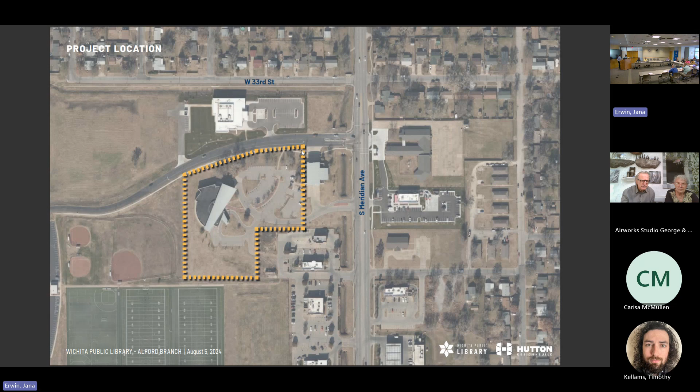This is the Alford Branch renovation, located on South Meridian Avenue. Part of this project will be to add a new drive on this winding road that goes back to the YMCA. We've been told there are wayfinding issues, and a lot of people miss this drive, come through this back part, and have to loop around. That's one of the improvements.

The existing building at Alford is largely designed with aviation as a concept. There are a lot of improvements that will be made. A big ask has been to improve the lighting, improve the acoustics, and redo this front desk.

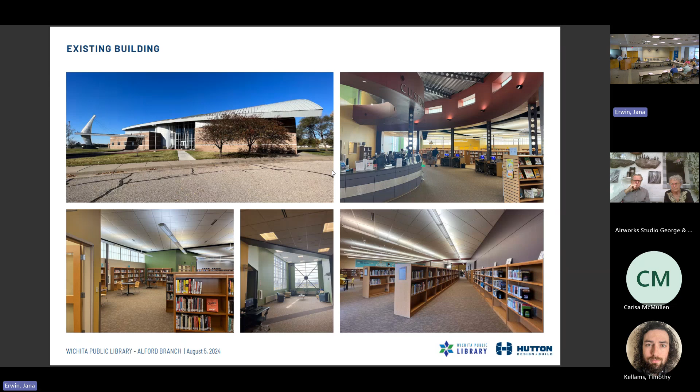We will be going through all of the stacks areas -- children, adults, and teens -- and doing new finishes. We will also be incorporating new meeting rooms and study rooms throughout the branch.

One of the asks we got in the community survey was that one of the focuses of this branch is workforce development, so lots of meeting rooms are needed -- for training, job applications, filling out paperwork and forms. That was one of the big asks received during the initial planning phase. With that, you can see the new meeting room space and study rooms.

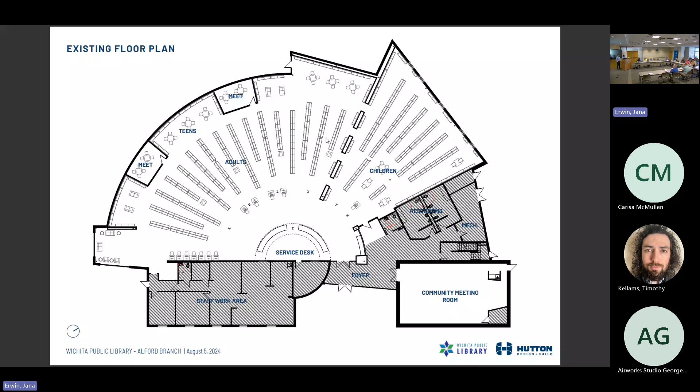This room and this room are existing, but we're adding these two additional rooms, reducing the stack space. Right now it was kind of a sea of stacks in there, so we're breaking that up and working with the operations manager to get the adequate number of stack space. Then improvements in the children's area, bringing a new family room to that space. The community meeting room down here will also be part of the project and receive new finishes.

As James mentioned, the namesake for this library was Boeing for a long time and was really influential in the aircraft industry, credited with bringing Boeing around during a difficult phase. So you can see on the exterior of the building there is a strong aircraft homage being paid there.

But once you get to the inside of the building, which you can see here, it wasn't being translated as successfully. So we're looking to take the precedent already set on the exterior of the building and bring that inside. The concept we looked at was originally more of an aviation concept, but in discussing with the users, they wanted it to feel a little bit warmer than what we had initially proposed. So we came up with this horizons concept that we're bringing through.

The stacks in this building will be reused, the shelving, so we needed to incorporate those finishes into our interior palette, which you'll see. This is how we're translating that inside, going with several new carpets.

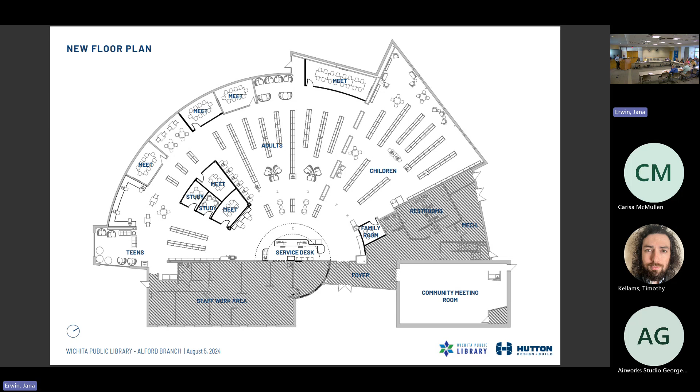This is Wichita Public Library Angelou Branch renovation and addition. This site is just south of 21st Street and west of Hillside Street.

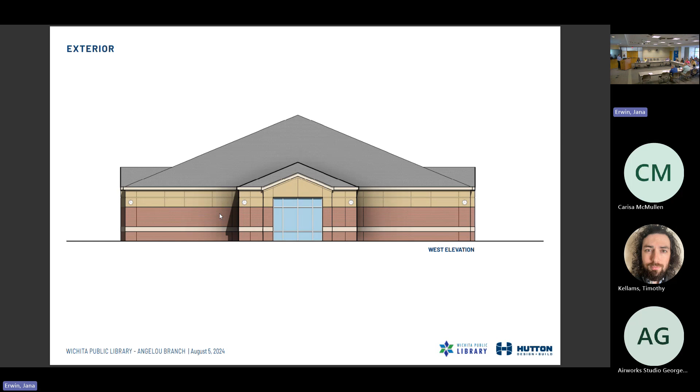So the concept we are working with for this branch is to bring the precedent and the aesthetic set by this mural that was added in 2021 inside the building. Right now that mural is such a graphic defining element of the street, and when you go inside the branch, there's no connection right now. So if you read the quote, tapestry is the element we took from that and how we can integrate it inside and carry that element inside. We're pulling from the color, the concept of the mural, and bringing that tapestry element inside.

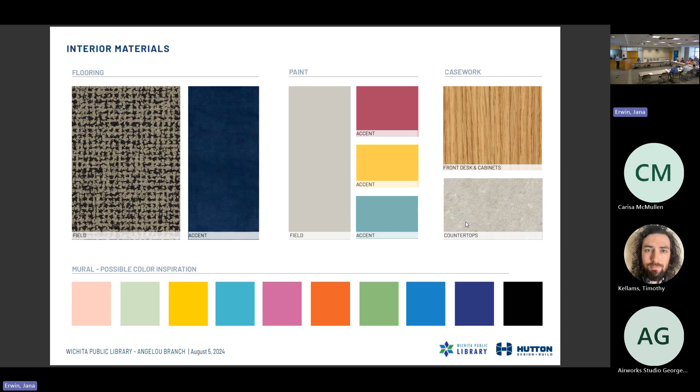How far within the building are you doing the finish updates? The only spaces excluded right now are the toilet rooms, the mechanical room, and the staff area, which is an alt—so it's possible the staff area won't be part of it, but everywhere else is included in the project.

Question: is the secondary entrance on the south side being improved at all? There are not currently any improvements slated for that.

One thing to point out on the north side—this is an ongoing newer development, I didn't even know about it. We've always been planning to place a new door here; right now it's just a storefront window. We're going to replace that, pull it out, put a new door in, and it will be added to the side of the building, wrapping around. This is very new, as of last Thursday, so we're still working on the design, but the plan is you'll be able to see it from 21st Street, from inside the library branch, and from inside the sunroom—a really nice dynamic element there.

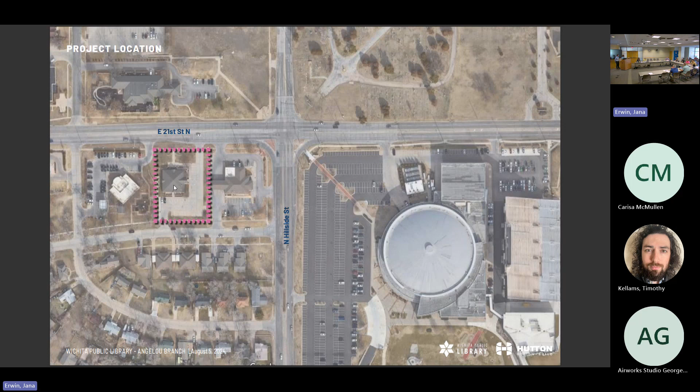Is the artist integration just the class? What is the scope of the artist work? Yeah, we'll touch on that when we get there. Got it—there's another project.

As far as the renovation, are there any other questions?

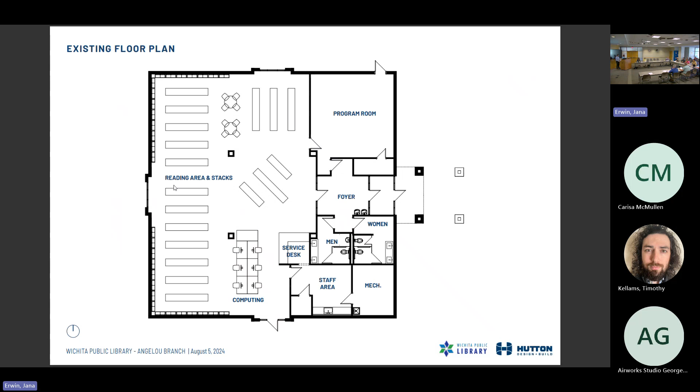Okay, then we can move to the second item, the art elements. We need to do it as a packet. Either way you'd like. Is there any landscape architecture to the exterior of these buildings? The Angelou will have the community garden, yes.

Why don't we separate them and make a motion for the design concepts, and then we keep art on a separate item?

So do I have a motion to accept the designs as presented? I'd make a motion that we approve. Second that. Any discussion on the motion? All in favor, say aye. Any opposed? Okay, passes unanimously.

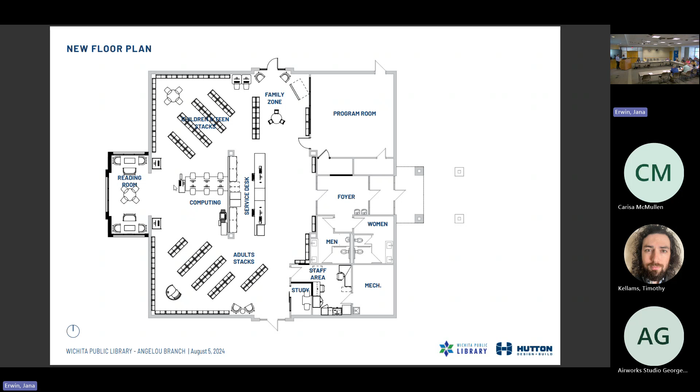Then we can move on to the art elements and the RFQ, and also administering the art review. You all received a copy of that ahead of time to look over. This is the call summary, the call is for all three branches - Rockwell, Angelou, and Alford - all three are included. This walks through the timeline, some history on the project, and the statement about the capital art improvement plan.

The art review, the plan is to issue that a week from today. We'll incorporate any suggestions or recommendations based on this. Application deadline will be September 13th. We're planning on all projects installing in June of 2025. The budget for all three is 179,100 divided between all the branches, and as we get into it we'll see where that money's going within each branch.

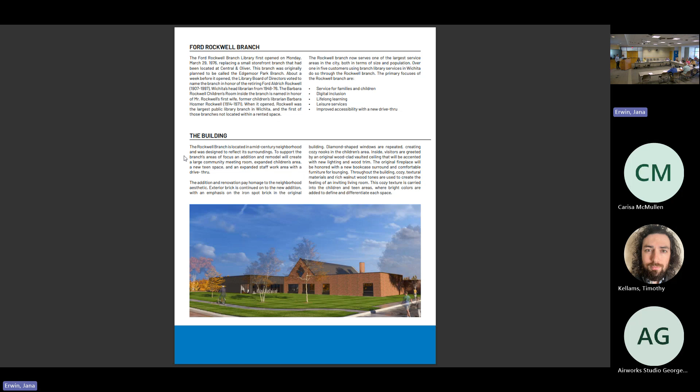Geographically, we opened this up to all US-based professional artists. We divided it into 3 areas. This is the Rockwell branch, giving a little bit of history about it, taken directly from the library sites. We talk about the primary focus branch, a little bit of history about each building, how it was built, and what the current scope and intent are. Each branch you'll see has this common theme.

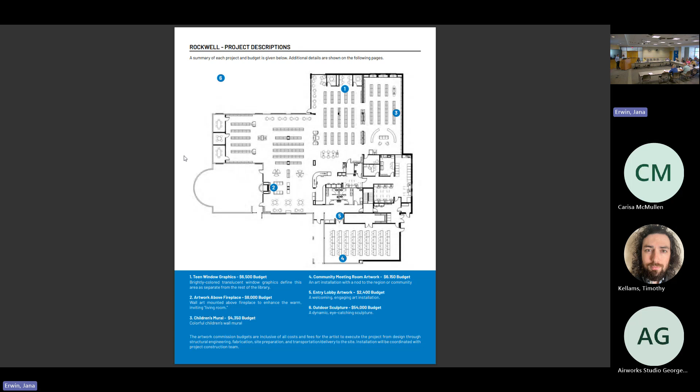We have an overall map with numbers assigned to each art piece - a brief, like number 1 is the teen window graphics, this is the budget, here's a brief description. After that it gets into more detail for each space.

So these are the teen window graphics at Rockwell. This is the first time they'll have a dedicated teen space, and we want to clearly say through design and art that this is a teen space. So that's what we're looking for there.

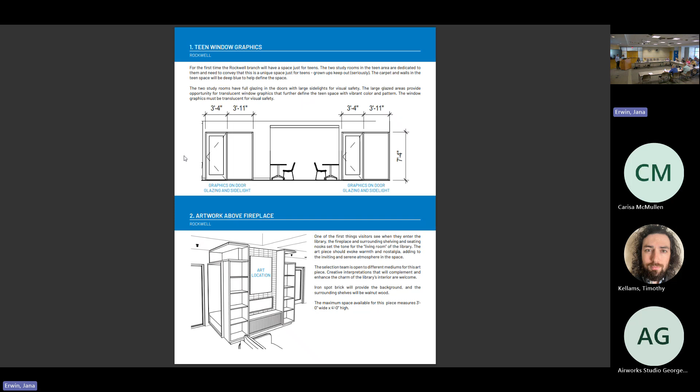There is also a fireplace at Rockwell that will be getting a new surround as part of our project, so we're looking for art above the fireplace. If you need me to go into more or less detail on each of these, just let me know.

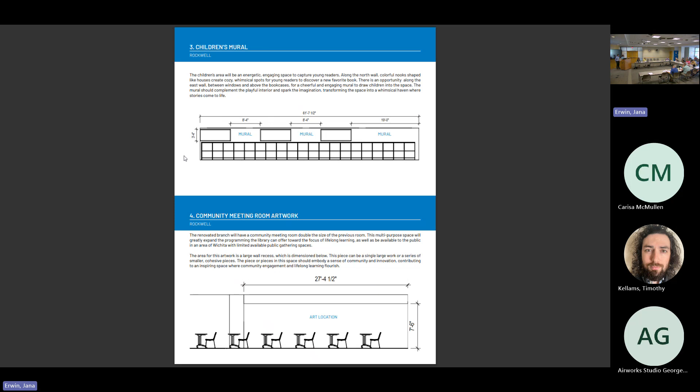Feel free. There will be a children's area at Rockwell for a mural along the wall of the stacks, similar to what was done in Evergreen recently. There is also an enlarged community room at Rockwell, so we're looking for some art inside the community room, and then in the lobby at the entrance to the community room.

The other thing we're looking at for Rockwell is an outdoor sculpture. From our site plan, this is 9th Street - right now the entrance is on the south side of the building. Part of our architectural intent with the updates to Rockwell is to bring a little bit more life to that north side and give it more presence from 9th Street, so a sculpture out there will further that north side.

Any questions about Rockwell? Then this is the material palette - this is exactly what you guys saw last time, just putting that in there so the artists have an idea of where we're headed. Any questions on Rockwell?

I'm curious if you could tell us more about how you went about dividing the budget into these - this is probably the one with the most items. So the overall pot of money, when we assigned it to each branch, we assigned it proportionally related to the construction budget. That's how we divided it up within each branch.

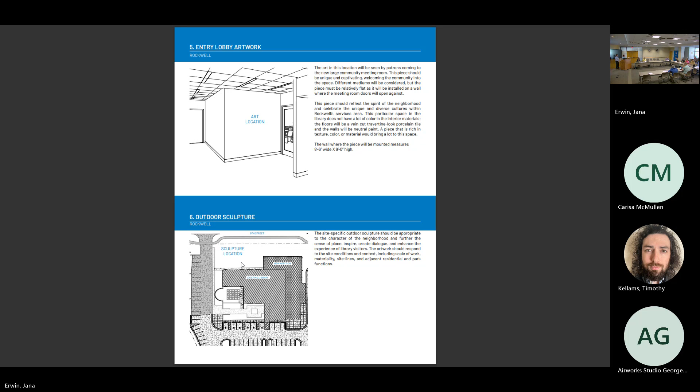That was not a nice surprise at permitting time, so. Good, thank you. Anything else on Rockwell? Okay, great, so can we move on to the next location?

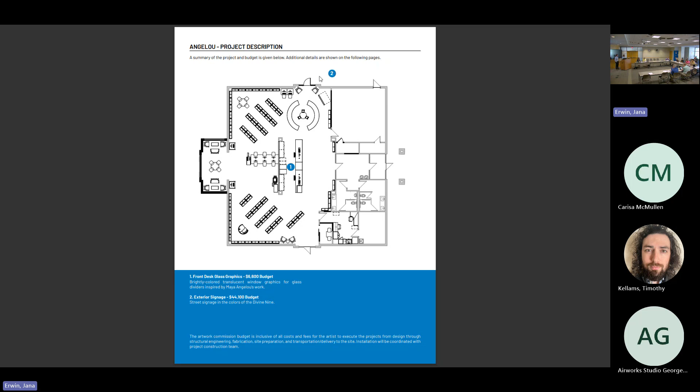The thought on this one and the history behind it - originally we were thinking about using this image we had of Maya Angelou, but as we talked more, her imagery, her face, appears in several spots outside and inside the building where there are portraits of her, and we didn't want to dilute that. So this changed to being inspired by her work, her life, and her activism - that's the direction given for that.

For the exterior signage, much like before, this is the view from 21st Street. I didn't specify the material of these letters - I didn't want them to have to be fiberglass or metal, I wanted that open to artist interpretation. I didn't want to tie anyone's hands, but wanted to specify they have to be durable and rated for exterior. Those are the 2 elements at Angelou.

Other questions? I have some about the letters. Okay.

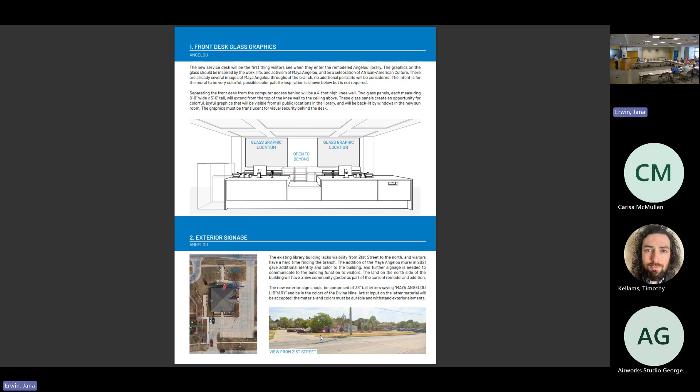Okay, and again, this is what you saw - Alford, similar history to what we just told you. So the locations at Alford are the children's area. There, we have really high volume ceilings here.

And so we're going to have 60-inch high shelving in there. There's a lot of space between the top of the shelving and the ceiling, so this is a great spot for a mural. Unlike Rockwell, there are no windows along this mural, so it's just a nice big expanse, similar to Evergreen, but even higher ceiling.

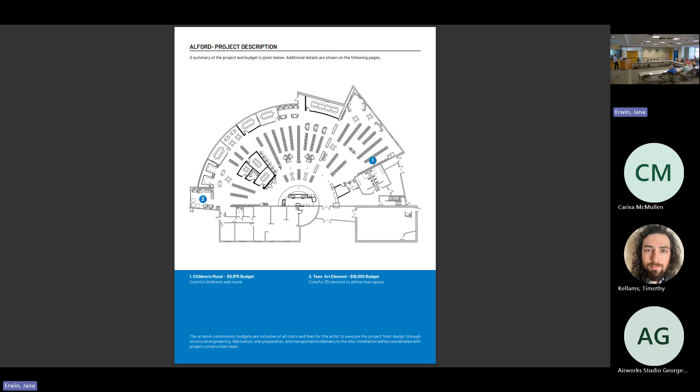And then we have our teen area. I mentioned before there's a designated teen area, and it's really an architecturally interesting space in there, so I need to pull that in. Here's the children's room before I get too far ahead - just showing the dimensions there, the bookshelves below, and the teen art elements.

And we intentionally kept this a little bit open. We can see this being a ceiling element, projecting off of the wall, or mounted to a wall. There are a lot of really unique ways, and I don't want to hamstring somebody. We didn't want to stifle creativity in this space - I think this is a space where artist input really could amplify the space.

We will add some room dimensions. I think it's also important to note there is a wall over here - I might provide some wall dimensions if it's a wall-mounted piece, just to help clarify that.

Do you think that's too open for an artist, or do you think that's open enough? I think just the dimensions kind of helps really understand the space, the size of it, and what's possible.

For this, if it is a ceiling piece, are there any weight restrictions, and will it have that drop ceiling? It will have a drop ceiling. Yeah, that's a good point - maybe we just say it must... well, it's not the ceiling. There's structure up above and roof deck up too, but maybe we need a caveat that no additional structure is planned to be added as part of our project, so whatever is proposed has to work with what's up there. It is a mural, right?

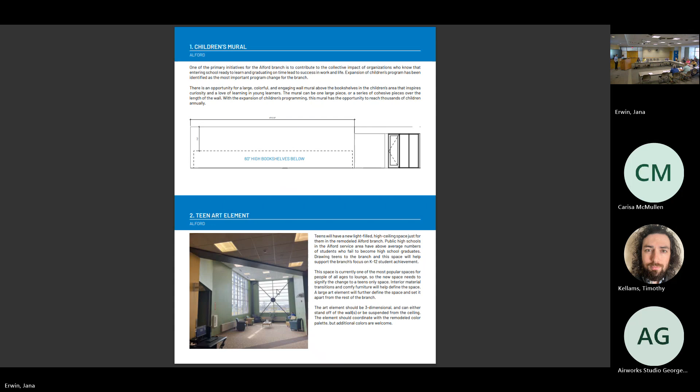Well, any other questions on the RFQ for all three libraries? Do you want me to go through? So this is the last page.

Yes, please. So we talked about this a little bit earlier, but we prefer to have local artists and firms, and will give preference to the artists that use the resources we talked about before. And then we said we really want people that are new to the field, so we encourage them to apply. We really want them to be little community pieces and accessible to a variety of people.

And then the selection process, we talked a little bit about the selection committee, left that open, we'll assemble that later, who will be on that. And then this is the timeline, it's a little bit more detailed than what we provided at the beginning. And then the selection criteria, the submittal content, any questions are due to me a week before, just to give me time to answer it and push all that information out to the artists to give them plenty of time to absorb that information and react to it, where this will be located, and the deadlines.

Okay, well if there's no other further questions or comments, we can move to a motion. It's gonna be a doozy of a motion, there are so many items. Any recommendations, staff? Yeah, we're just approving the RFQ. Right, I have a quick question, actually.

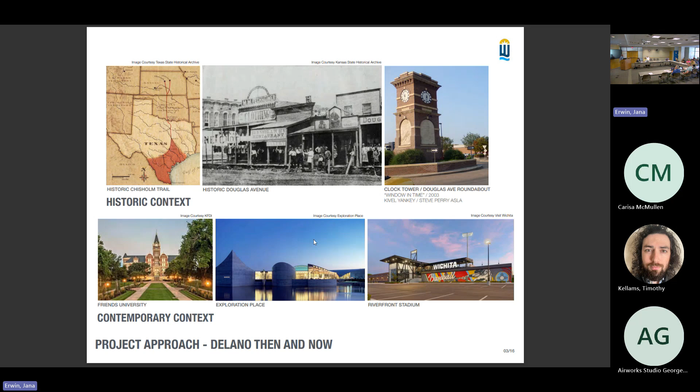Here's a little bit more context of our site. Some of the identity drivers are shown in site images here. This is more than our project site. This is Seneca, and this is Meridian. So we're now beginning to focus in on that larger Delano neighborhood. We're showing here kind of the pre-established Delano commercial district that goes to the roundabout and on down to the river. We consider that an established identity, and we consider this an opportunity to draw from some of that identity, yet still be appropriate for an area that does feel different.

We have a lot of residential in our project scope, whereas there's virtually no residential beyond in the quote established identity area. So here, when we look at our corridor, you see the left half is heavily residential. The right half is much more commercial. And then we have the rail corridor crossing toward the center of the site.

Carisa led a tree canopy survey of this site last summer, and we found about 104 trees in the city right of way, and 100 of those are healthy and in good shape. That's really good news. So preserving the existing tree canopy is a driver for the project. How can the art elements respond to that? We want to basically avoid visual conflict with trees and physical conflict with trees. The landscape approach will be collaborative with the artists to support their specific aesthetic intents as the artists have the opportunity to develop their project and their solutions further, which will bring back that final artist solution.

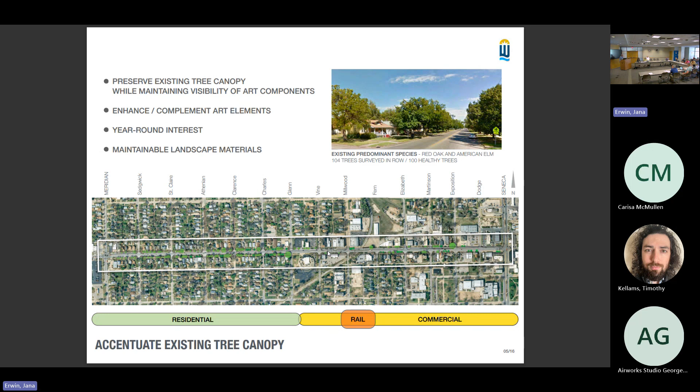This is the 30% intent share for today. Here we're looking at that 1 mile corridor broken into 3 pieces on the slide so that they would all fit. We'll start with site A at Meridian, that we're considering a gateway opportunity to the city, to the district, as this is its western edge at its central corridor roadway, which is Douglas.

Site B, we're showing an opportunity zone that is in an area where we do not have a lot of tree canopy. We have a lot more open space. We have a lot more commercial space. And we feel like that's appropriate for a series or a cluster of sculptural elements designed by Airworks Studio. And we'll show you those in more detail.

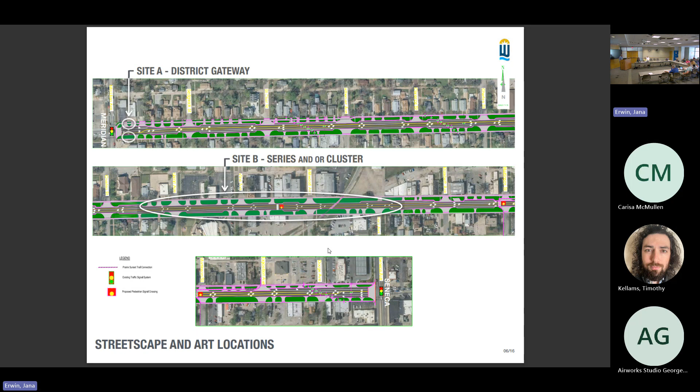First, we'll take a closer look at the Site A Gateway District element that Del Norte Studio and Armando created. This is a pair of sculptures that sit either side of the roadway within the right-of-way. Here's Armando's work, showing his sculptural approach for that pair of elements that announce your arrival and entrance to, or egress from, this neighborhood. You see how powerful that canopy of trees is beyond that as a backdrop for this.

Fortunately, this is an open space where no trees would need to be removed to achieve the installation of this pair of sculptures. These are approximately 15 to 18 feet in height. This is part of what Armando submitted in his proposal.

Some of his inspirations include the headdresses worn by Wichita First Nations leaders and warriors, and then the iconic Texas Longhorn, as Delano's first real character was born of the boomtown Chisholm Trail, pre-Wichita days when Delano was its own community.

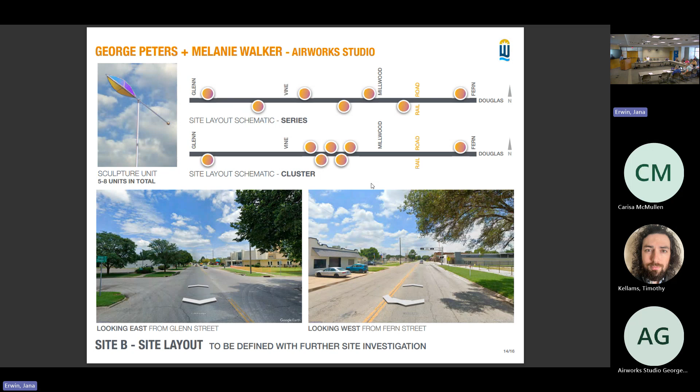Any questions? Here, I might start. George and Melanie, so these—I'm just trying to tell from the rendering—are these flat or voluminous feathers?

I'm sorry, ask that again. They're not online? They should be online. Yes, we're here. Yeah, we're here. Did you hear that question? I can't tell from the rendering if these are flat, the feathers, or if they are voluminous. Oh, voluminous—I said illuminated.

They're three-dimensional. Yes, there's basically three fins, three fins that are in a triangle. So they look good from below, and different views down, they'll be very visible.

Thank you, and I have to answer that this particular site—this is where Armando's monument will be. And we just put this in that area because there are so many trees down Delano, and these would kind of get lost in a lot of the foliage there. So we just wanted to place it in some area, and then it was decided that this would work well in Area B.

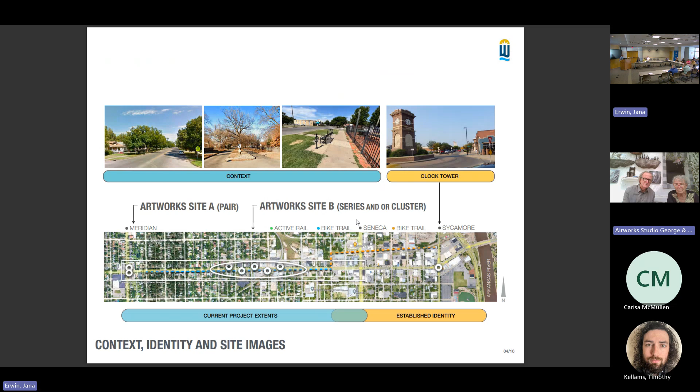This is less of a question and more of an observation, but first of all, I love both of these, I think they're beautiful. Just outside the scope of this project, Delano has such an identifiable footprint, and with the clock tower already such a great indicator of entrance to Delano, it's great to see that landmark on the other side. My comment would be that you're trying to create connectivity throughout that corridor that right now does feel disjointed. I hear the beauty of the cluster, but also, how do you not make it more of a breaking point rather than continuity along there? That's my one comment on those. On Armando's, I like that you've still got a variety of elements you're looking at, particularly for that pedestal. Somehow tie back into that clock tower, whether through that touch of brick, or in one of your renderings you have that arch that mimics it, but somehow I just feel like trying to create some connectivity, which is why I liked both pedestals picking up on the architectural elements with the stone and the brick you see all over, or maybe some tile, but tying it back to echo that.

Do you know the size of that pedestal? When the RFP was presented, it had a 6-foot tall pedestal included as part of the project, so that's why you see that scale there. Width-wise, it's not totally determined yet, probably close to 5 feet. It'll depend on the engineering, the weight of the sculpture, and what that requires, but what was presented on the RFP was a 6-foot tall pedestal, about 6 by 6 in plan. Roughly, and that's what I used for these dimensions in this concept design, but that might change.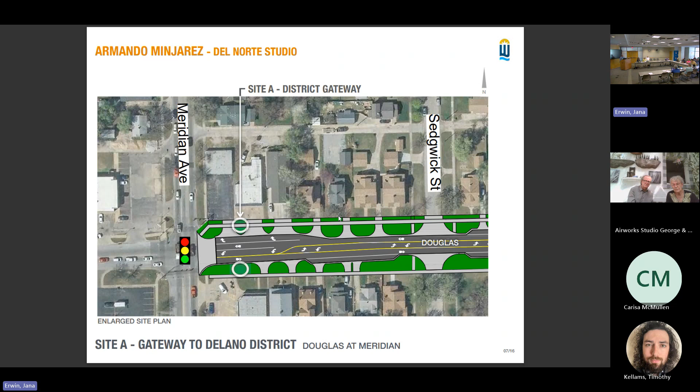Armando, on the feather and the curvilinear element, by the way, I love the feel of those two parts of this. Materials, aluminum - what are you looking at material wise? So I know I want it to be some sort of metal, either powder coated metal or aluminum. Again, I really need to figure out the weight and how that's going to impact the height and the footing.

So are you aiming towards any kind of finish? Ideally, this would be a powder coated finish. I don't want the finishes to stand out from the character of the neighborhood. For instance, like a stainless steel that is brushed - I feel like that would be maybe too contrasting with the neighborhood.

So right now I'm looking at probably powder coated with some sort of color. I know that you're 30% here and you've still got stuff to go. I gotta say the tall box Delano throws me off on these. You've got such a beautiful line kind of going on in there, and just the stacked Helvetica letters on that. I'm kind of going - is there a way to kind of get that to feel like it belongs more with the rest of the piece?

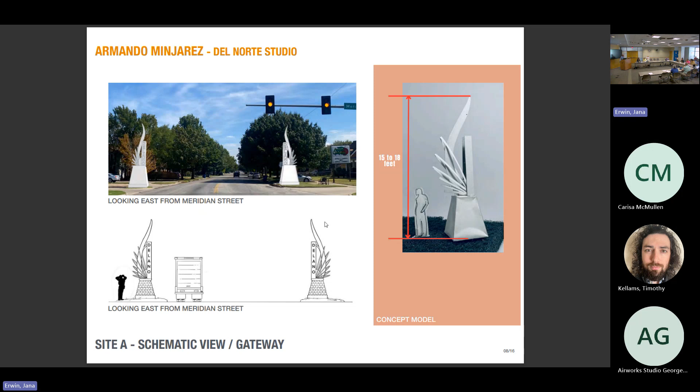When we're talking about the kinetic sculptures, I was just looking at some of Armando's references as far as the Wichita leaders and warriors. And in these pictures, I see that people have different numbers of feathers in their headdress. So I wonder if there's some research that can be done - there's some meaning tied to the number of feathers that are clustered together, like 3 means something, 1 means something, or 2 means something. I think that would be really an opportunity to continue to pay homage to the Wichita people and to make more meaning to how this is laid out across the board.

Yeah, that's very interesting - to take it deeper. Yeah, that's a good suggestion. We'll look into that.

Yeah, I guess at this point, unless there are any other questions or comments, I'll look for a motion. Make a motion to receive. Is there a second? Any discussion? All in favor? Opposed? Abstain. Great, comments, thank you so much.

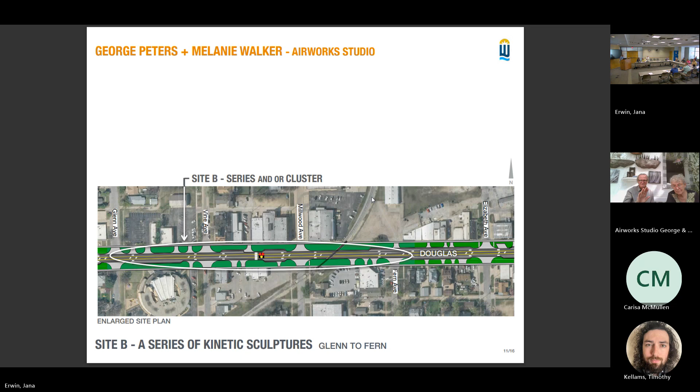Okay, so the last item, well, no, last item to discuss as far as the projects is the Country Acres Dog Park. And they're looking for final approval, right? So everything to do.

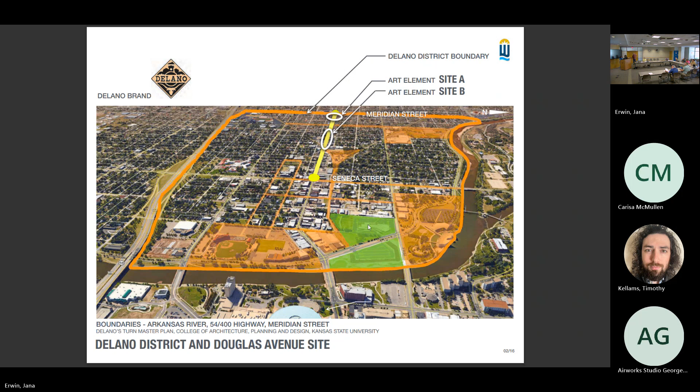Here we go. Okay, so some of you weren't around during April 1st of this year, which is when we first presented this project for concept approval and feedback. So today we're going to re-present this, just to give background for the people who weren't here before, and we already received that feedback and worked on changing things as per the feedback. So now we're doing the same thing here. This is for the Country Acres Dog Park.

Just to give you background on that: the approved 10-year CIP program contains $750,000 for the construction of a dog park in Country Acres Park, of which $50,000 was allocated for art. Baughman Company was hired for the design, and yeah, it's basically what I said about April 1st.

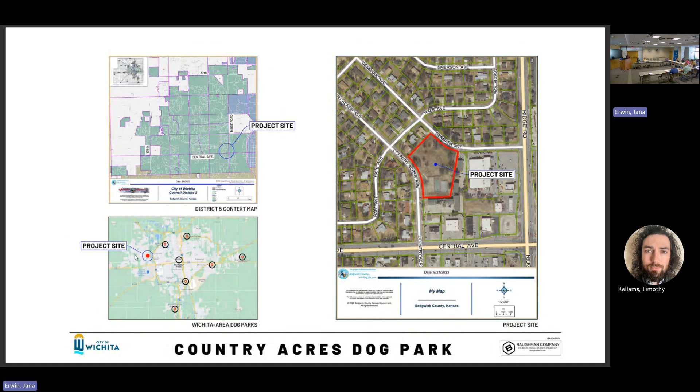So just so you know the context of the site, the park is located near the intersection of Ridge Road and Central Avenue. Each region of the city contains a dog park nearby, and the west side of the city needed one, which is why this project exists.

So just a bit of context on what was there: there used to be tennis and basketball courts. They were in terrible condition and were demoed recently. Also, the city has acquired this bit of land over here on the south, around 1,700 square yards in area, to add a parking lot.

So this is where the entrance will be, and this is mainly where the park installation is going to happen.

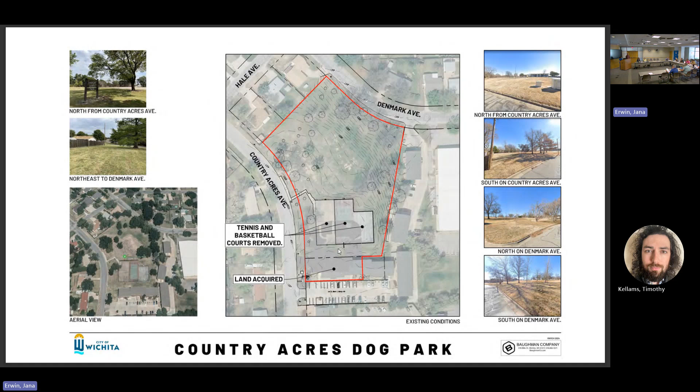Background on the RFQ: we issued an RFQ in December last year, and we got 22 applications, but had to reduce them to 6 because some didn't meet the required geographic criteria, which is they have to exist locally. So 6 applications were honed down to 3 by the selection committee, and the proposals were reviewed in March, and Mr. Conrad Snyder was awarded the project.

The selection committee consisted of 3 City of Wichita staff members, 1 from Baughman, 1 from the district advisory board, 1 NEA grant artist, and the representing council member. So this is just the initial concept that was presented on April 1st.

You can see 2 dogs in opposite corners, like an entranceway kind of setup. If you want, I can give you the floor.

Certainly. Yeah, well, I'm Conrad Snyder, and thank you for having us back. I do medium to large scale ceramic work. I have a number of pieces around town, and I can talk a little bit about those. But the idea here was to have the dogs kind of welcoming people in, an entryway, entries, creating a gateway to the park. You can see the scale there—they would be around 8 feet tall and sitting on pedestals.

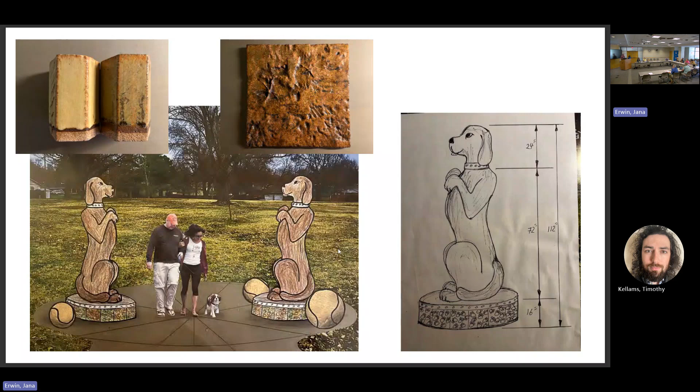I love clay, and I love touching clay. I love when people do touch clay. I'm a very hands-on person. Clay really lends itself to that in public art and just in general.

So I actually brought some physical pieces here. You can look at some of the colors and textures. If you want to pass those around, or if you want to look at them.

So the dogs, having one dog down, I think would provide a lot of potential for kids to climb on it, put on its back, kind of in that saddle area, and ride it like a horse. And they're perfectly fine being treated that way. Other issues with the clay, being in a dog park, are the dogs are going to be marking it - there's going to be pee on them, and that shouldn't affect the clay at all.

Stainless steel - the collars and the top of the pedestals would be brushed stainless steel with some kind of added carriage bolts welded in, I guess that I'd call it.

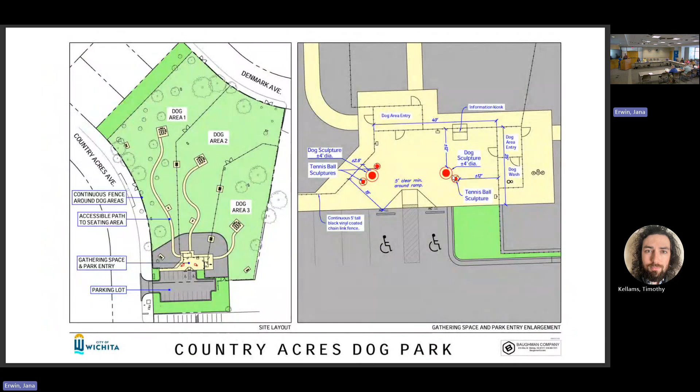Yeah, the initial one was just the drawing. Yes, photos of a three-dimensional model. Well, yeah, I guess there you have it. There it is. Okay, thank you.

Oh, well, the main library - the boulders that are in front of that.

So as a material, clay is a pretty good, strong material as long as you don't have sharp edges that can chip. There's a company I did a project with, and they do vitrified clay sewer pipe. We've all had pots in our backyards that have broken down and kind of flaked apart and didn't hold up - that's because the clay wasn't completely vitrified.

So if the clay is completely vitrified, it won't soak up water, and then the freeze-thaw type cycle won't break it down. The company I was working with - we were doing a sculpture project there, but they do a 100-year written warranty on the clay pipe. It has a 1,000-year life expectancy. Clay pipe that the Romans made has been in the ground for 2,000 years, been used every day, and it's still holding up. So it's a really good, strong material.

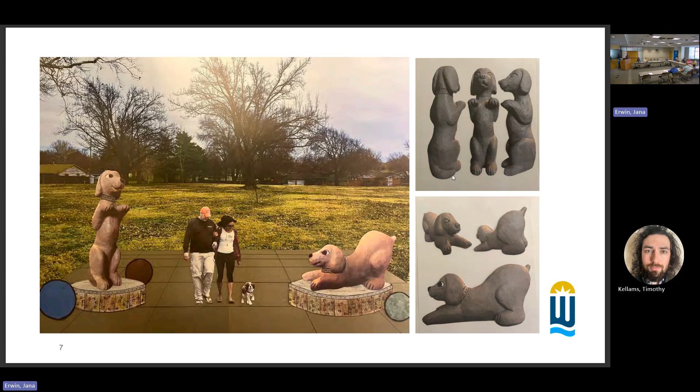No other questions or comments on this project. We have a motion to approve as presented. Motion to approve, I'll second. Any discussion on the motion? All in favor, say aye. Opposed? All right, passes unanimously. Thanks, Conrad, good to see this wonderful fun dogs project.